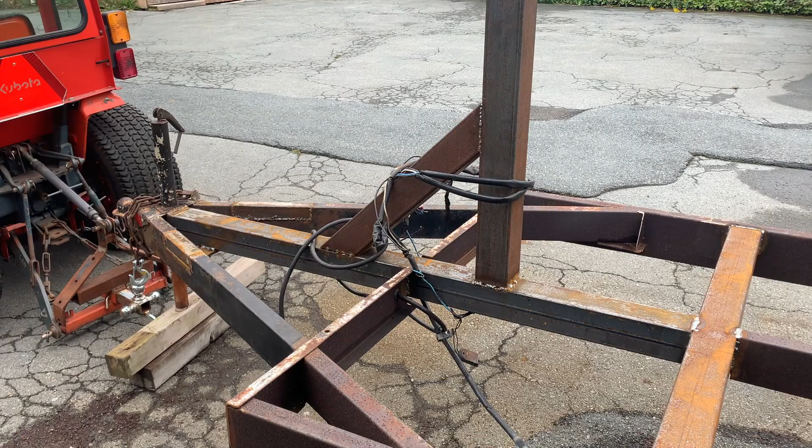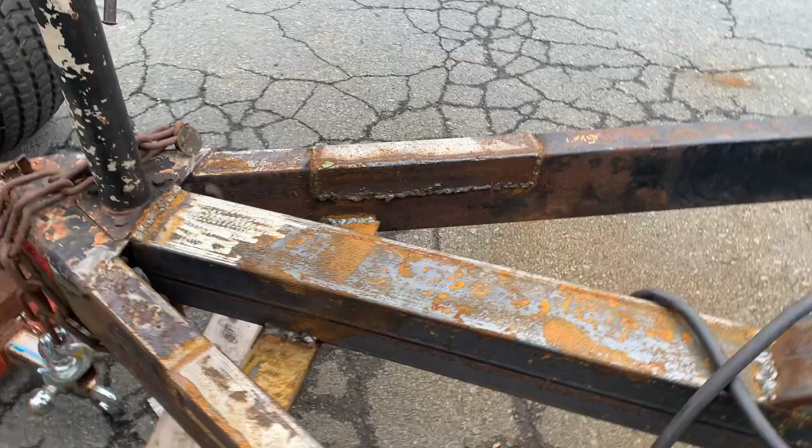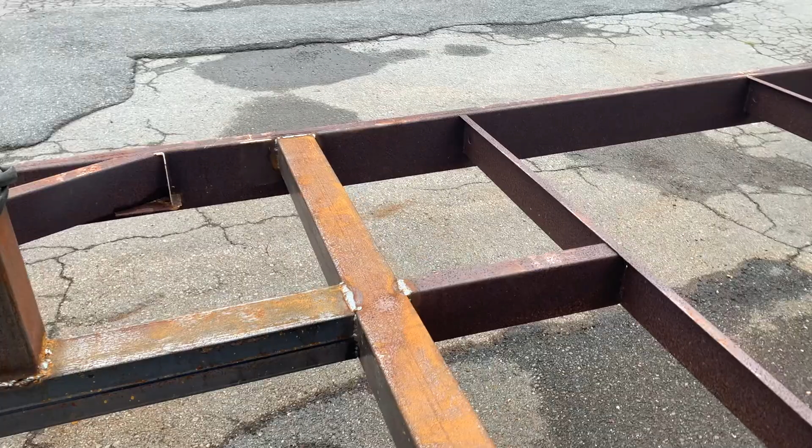Okay folks, I've got the welding all done for the frame part. Just a quick recap - as I mentioned earlier, I was going to put a brace underneath this tongue post, so now that's really sturdy.

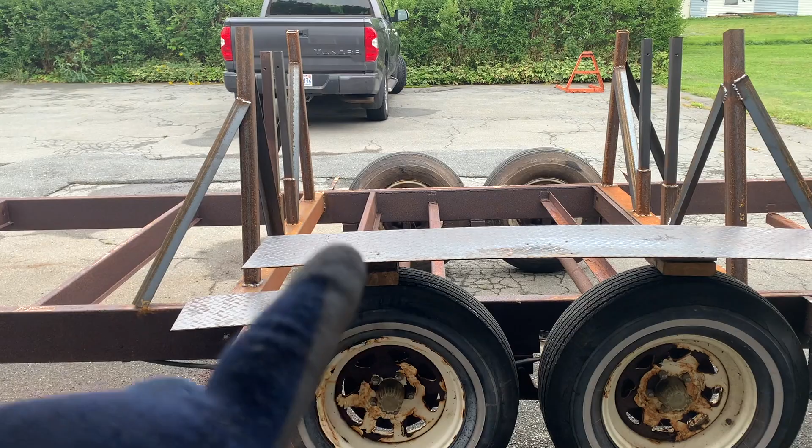The winch post is all in place, everything else is completed. If you're going to do this, make sure you weld underneath as well to give it increased stability. Let's continue with the frame portion - we're going to make some fenders. Let's review some basics about fenders. The distance between your tires and the fender should be 3 to 4 inches, to allow for the suspension to move.

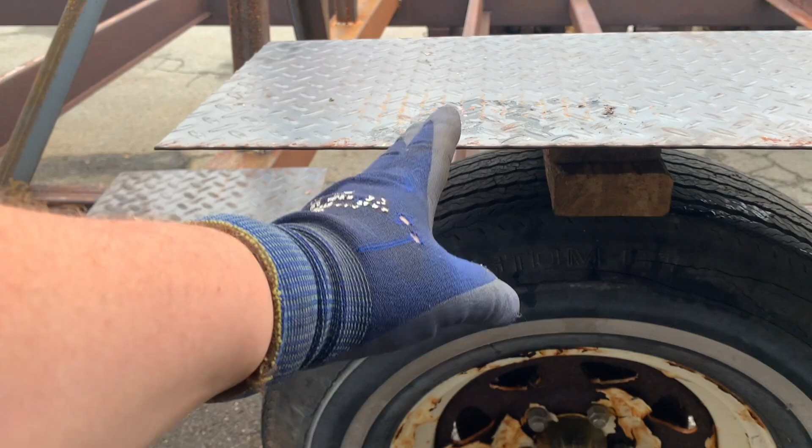Just for aesthetic purposes, I'm going to have these going at about a 45-degree angle. I've measured that, and the rear is going to have a drop flap, so I don't need to go all the way down with my fenders. Essentially this top part is going to be 48 inches, and then the remaining angle is going to be 45 at the front and at the back.

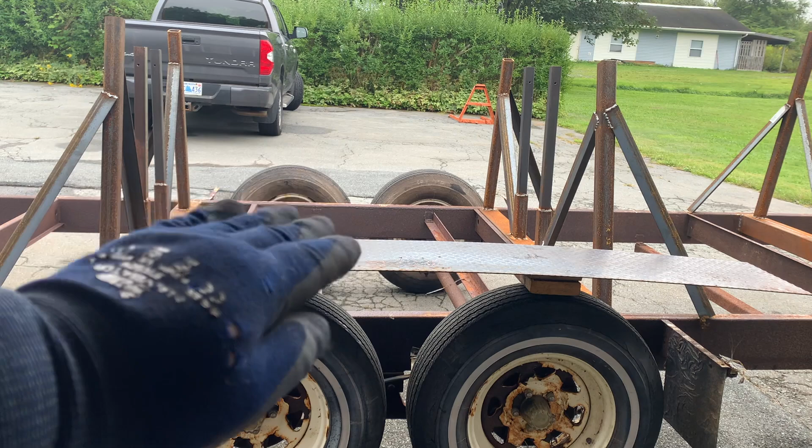That requires a 12-inch piece of this diamond plating. I'd like these to be nice and sturdy, so what I'm going to do is put a brace in the middle that's going to come up at an angle, and I'll have a triangular piece supporting the weight, and then the rest should be taken up by these cross members that are here and here. So let's get cutting.

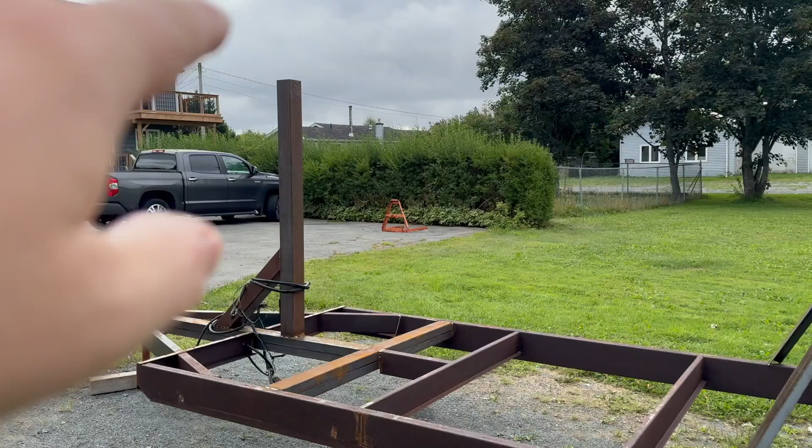One of the accessories that's going to be pretty important to put on here is tie downs, and that's for, say, a big strap to go over your boat and hold it down while you're traveling. You can't just rely on the weight. So what I'm going to install is 4 tie downs, and each one - focus on this - each one is rated to up to 11,000 pounds.

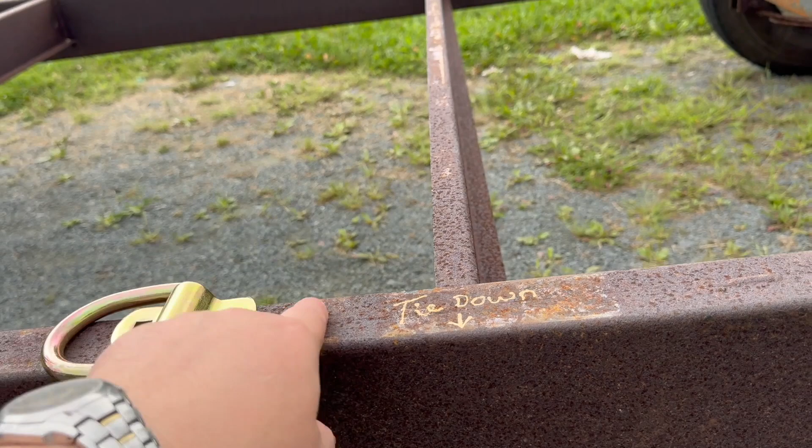Now you can choose to put them on top like this, and that would be alright, but I think I'm going to use additional surface, either by putting on a steel plate here and then welding on top of that, so that I can have additional welding surface area, make it stronger. Alright, let's weld these tie downs in place - we'll tack them on first.

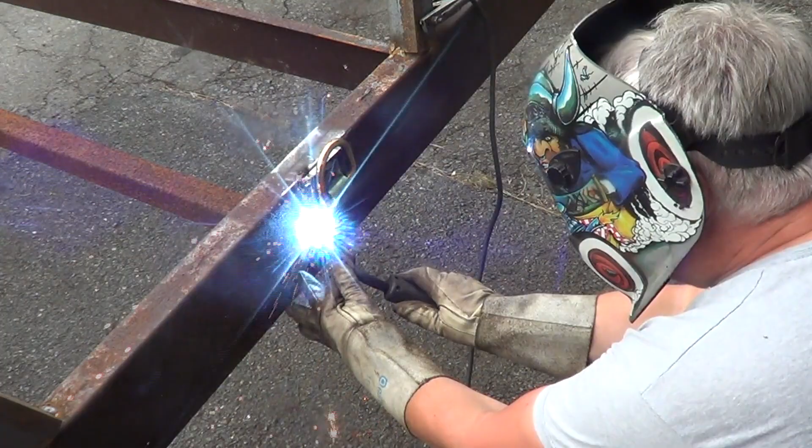Alright, I'll tack them all and then I will finish the welding.

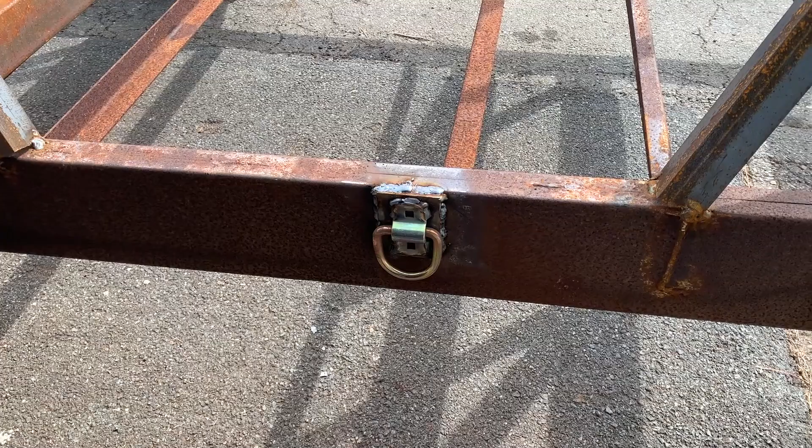The tie down welding is completed, and as I said earlier, each one of these hooks can take 11,000 pounds. So I welded each onto a 3/8 of an inch thick plate, and then welded that onto the side of the frame at the exact locations where it needs to be to hold my particular boat.

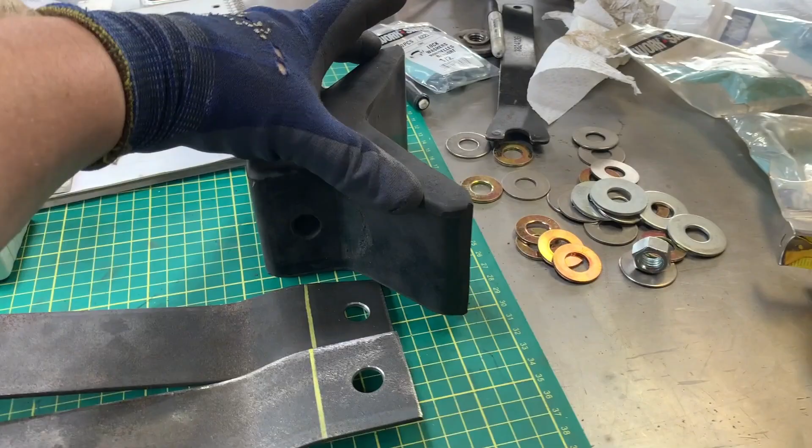My friends, it is time to work on the winch post. The first thing I want to do before I put on the winch and whatnot is fit this bow stopper. This bow stopper is 6.5 inches in width, and this block here is 3 inches wide, has a hole of a diameter of 0.5 inches.

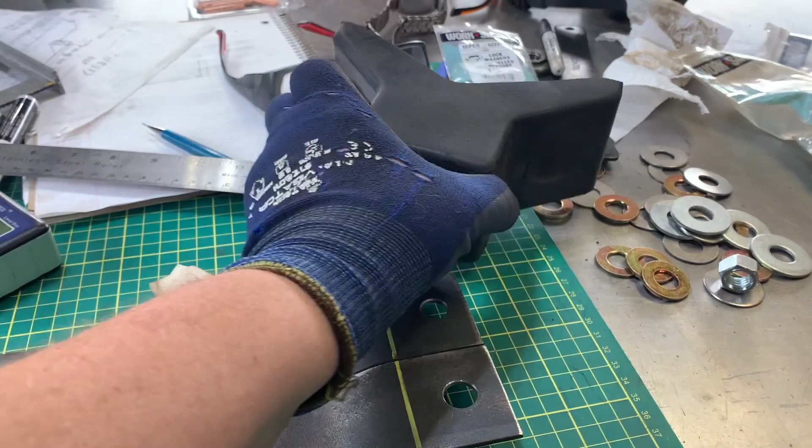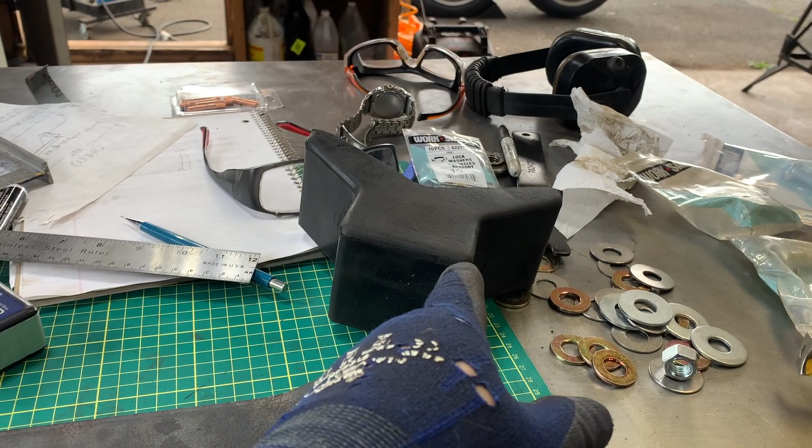So what I've done is I've fabricated 2 brackets, one to go on each side of the post, and I'm going to explain to you how I did this. Well, first of all, these are approximately - let me see here - about 1 foot long, and as you know, my winch post is 4 inches wide, this is 3 inches wide. Therefore, I needed to have brackets that had a bend of 1/2 inch in order to then clear the winch post. Now I'll go into details of how they're going to attach a little later.

But first, I think it's important to go through this - how do you get a curve on 2 pieces exactly the same? Quite frankly, it's not that complicated. First of all, you need to know the distance between where you want to end this piece and where you want to start, where it starts and where it ends. So this is about 1.5 inches. Great, so I made a mark here on both.

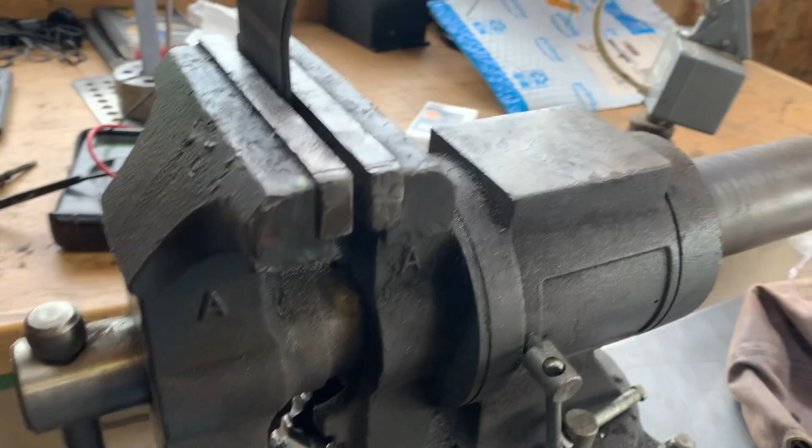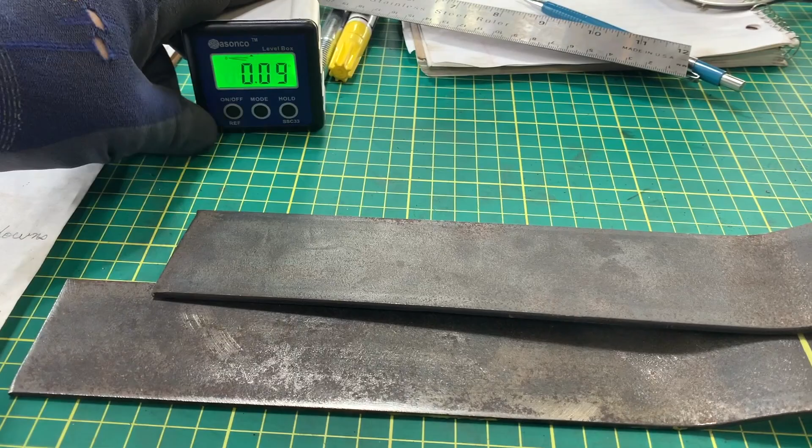Then what I did is I took both pieces, put it into my vise, and bent down right to where the mark is. At that point, you can either struggle or you can use your brain and not struggle. So essentially, I bent them until they were at 65 degrees. That bend you see here is 65 degrees, measured using one of these little electronic angle finders. It's just a fantastic tool.

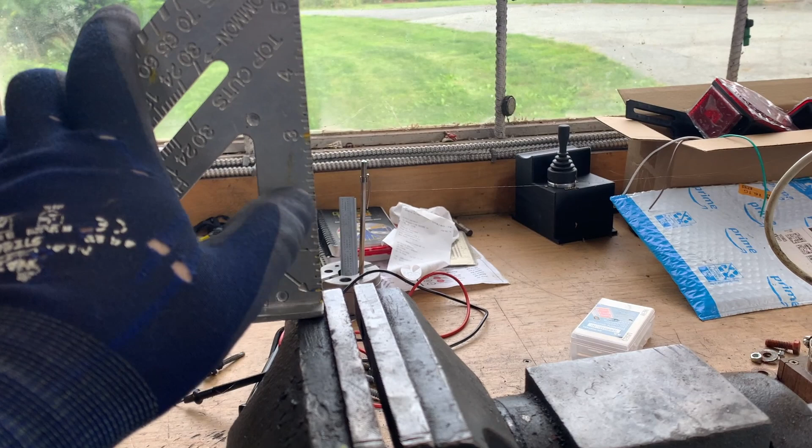Once I was done the first angle, I had to bring it back so that it would come back to 4 inches at this end, starting at this end. So I took this and made it so I basically had a piece that came at an angle, and where it reached half an inch, I scribed a little mark, which you see right here. So I put those evenly in my vise and bent them until they were 90 degrees.

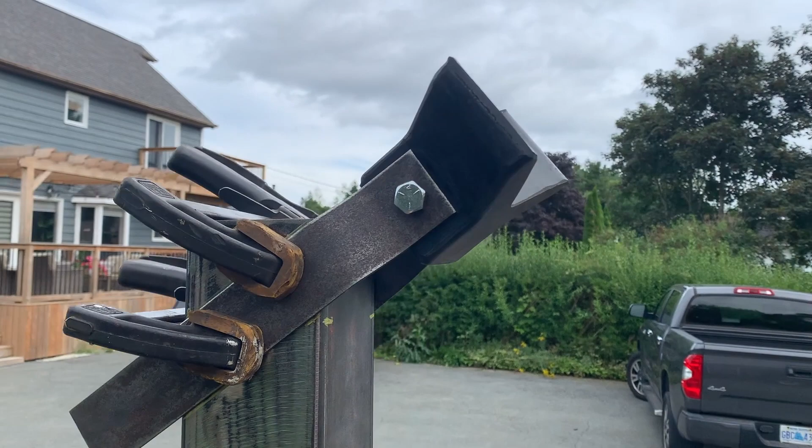And this is the result. I'm at the top of the winch post right now, and you see I've got the bracket assembled, temporarily of course. I've got a couple of clamps here to hold it in.

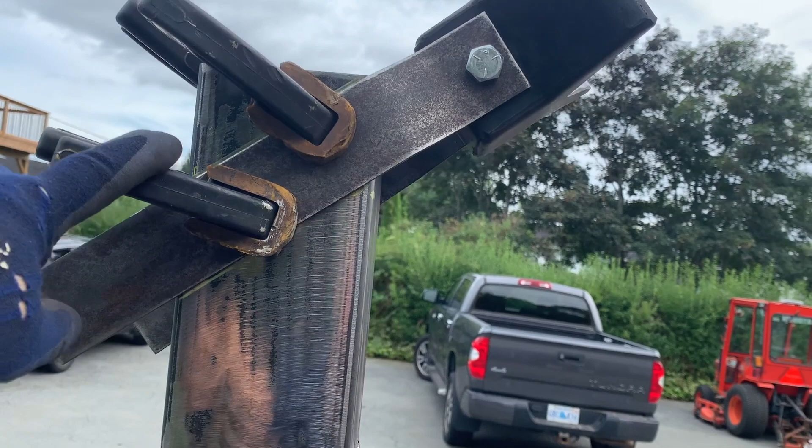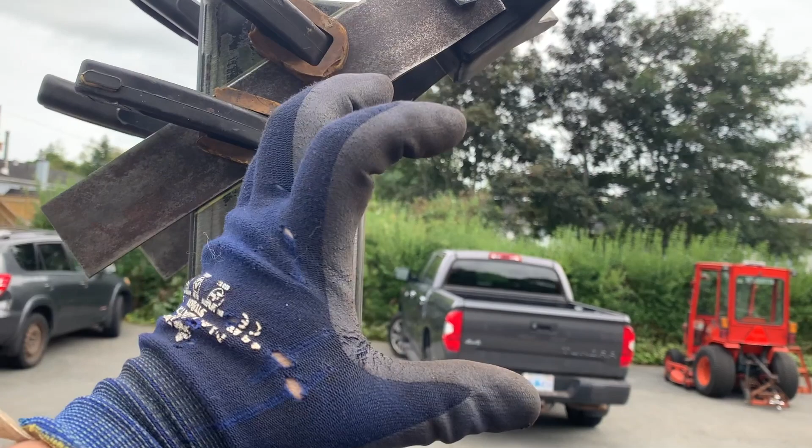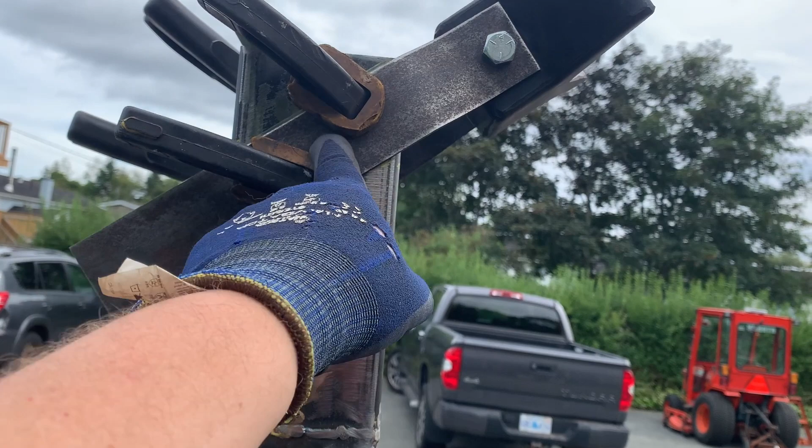One of the important things to do is to retain an angle for this bracket here. In order to do that, I think what I'm going to make is a U-shaped bracket that goes in like this, about 2 or 3 inches wide. That's going to have a hole, and the hole will go through into the post. In order to make this adjustable back and forth, I'm going to drill multiple holes that'll start here and go in 1 inch increments until I reach about 2 inches from the end. I don't want to make this too weak.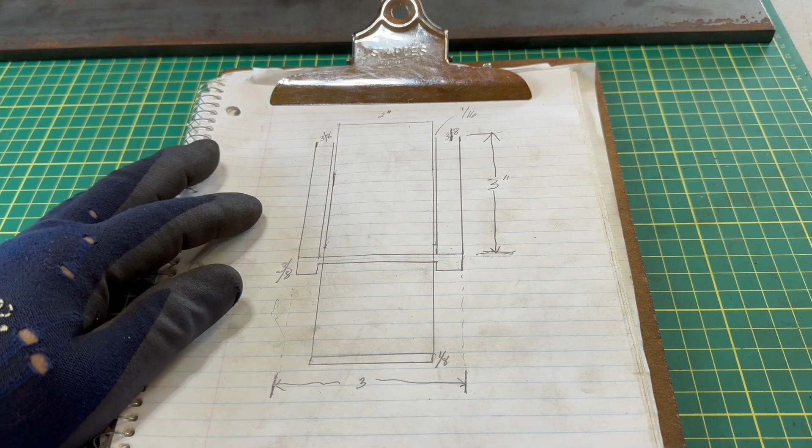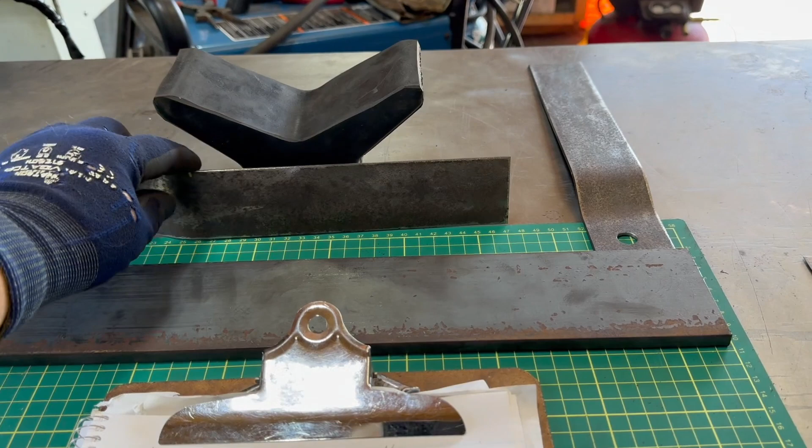Now it's time to actually finish the design and fabrication of this C channel, shall we call it, for these 1/8 brackets, which will serve as guides for this bow stop. I could have chosen to take some 1/8 steel and cut and weld stuff, but I've got a milling machine. Some of you might not, but let's roger that—I do stuff the way I want to.

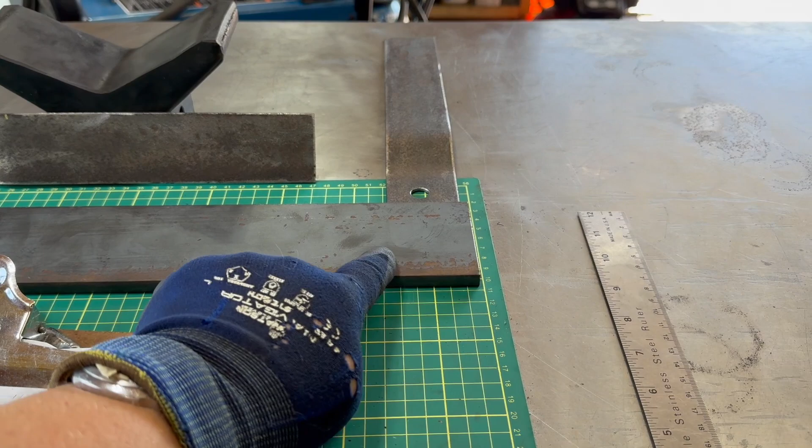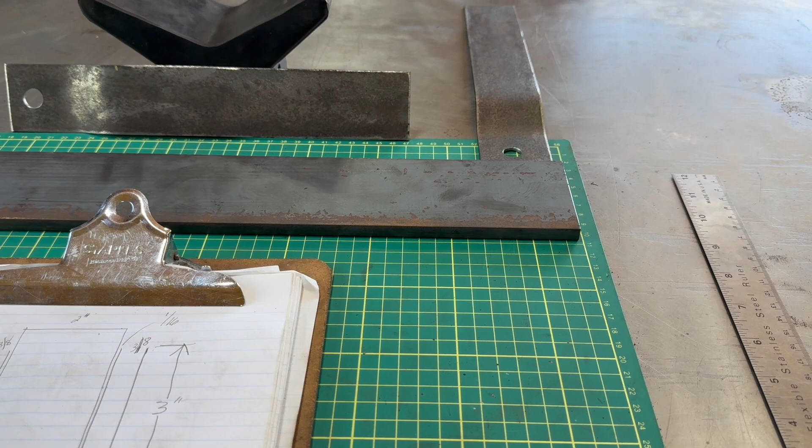So what I'm going to do is take this 3/8 of an inch steel bar, which is 3 inches wide. I'm going to cut a 3 inch piece of it, times 2. And I'm going to mill 3/16 into this thing to a width of 2 1/8, leaving 1/16 of an inch on each side so that it can slide.

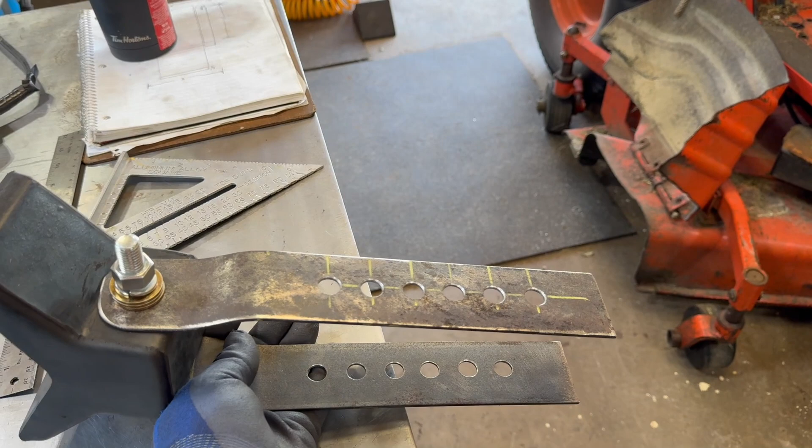I did a dry run and then figured out where to drill the holes, and so I've got 6 levels of adjustment, which is really good. So let's go and let's try it out on the winch post.

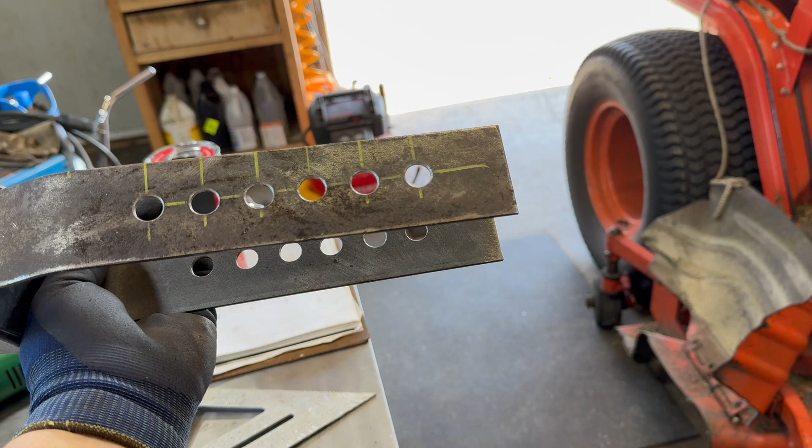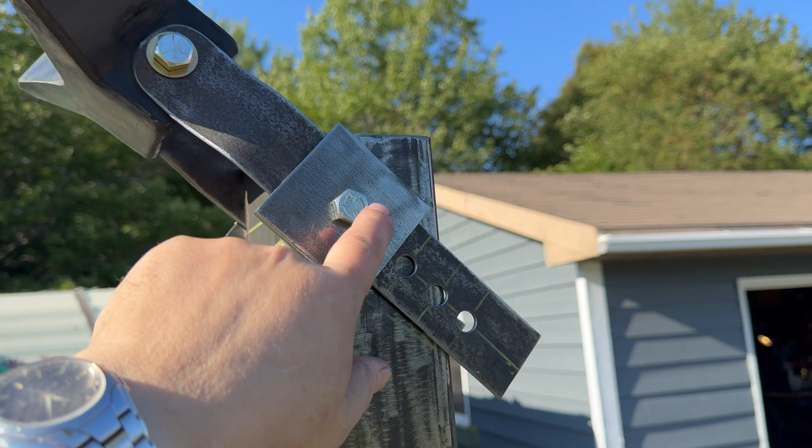All right, so this took a couple of dry runs in order to make it fit just the way I wanted, but it's working out pretty good. The bottom line here is that this C channel keeps the movement only in one direction. It is not able to let this stop move up or down, just one direction. So the only thing left to be done is weld this.

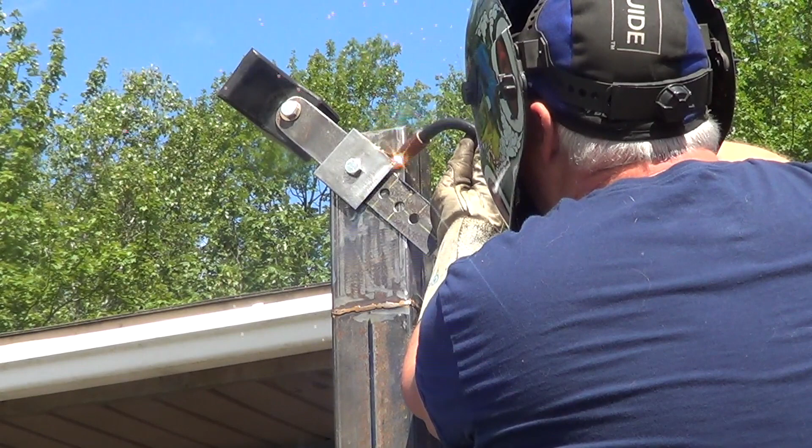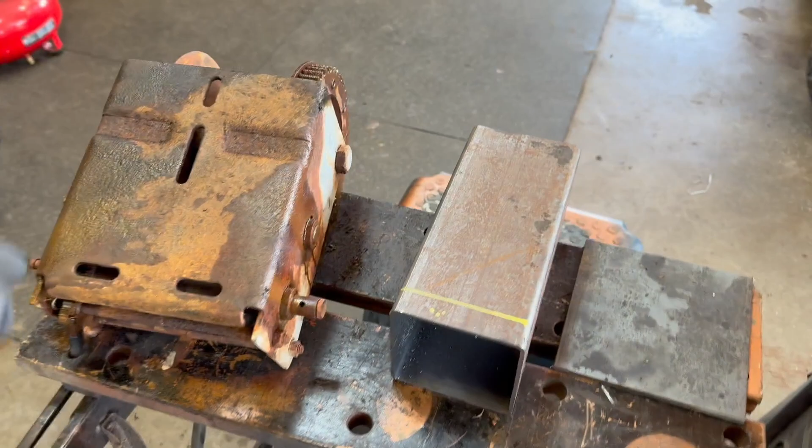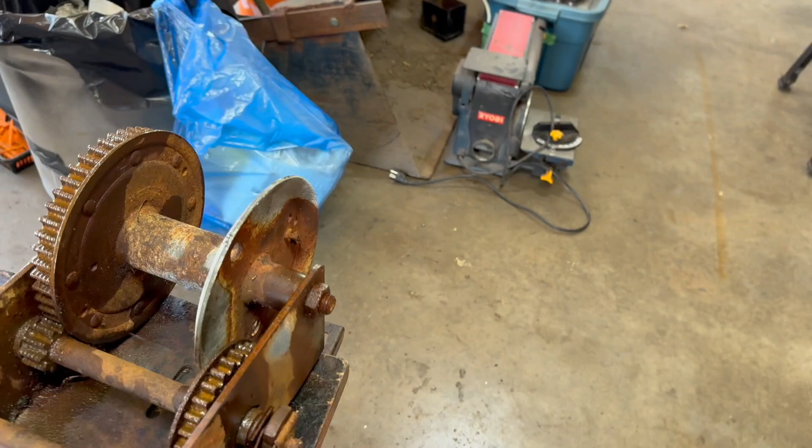Morning, back at it again, and today I'm going to tackle the winch implement. This is a unit someone gave me. It's rated at 3,700 pounds, and it's a 2-speed job. The second speed is 1,700 pounds. So I want to mount that on the winch post, and the easiest way to do that is to cut this 4x4 to length to accommodate the bolt requirement of this unit.

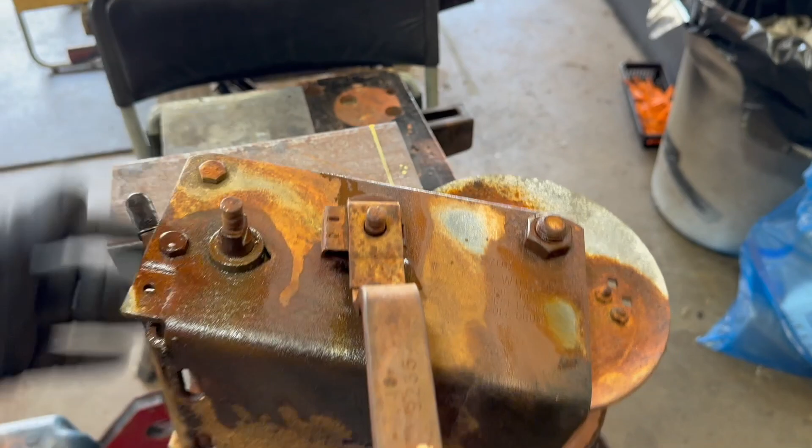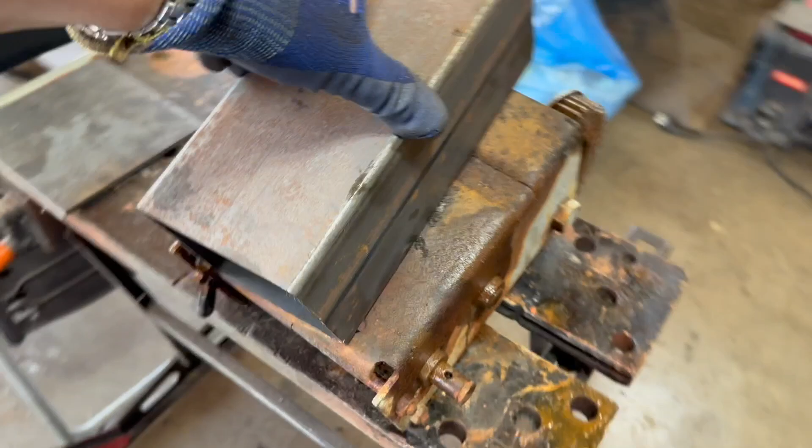Might actually weld it, I don't know. And here's the pattern, so this would cover that. I could get it nice and centered on the winch post at the back of the bow stop. So it's time to get cutting and welding again.

If you're wondering what I'm using to degrease that unit, because you don't want to have any oil traces when you try to weld, I use this WD-40 degreaser. It's very good. You can mix it with water so you get a little more for your money. Just spray it on, let it do its job, and then wipe it off, and that's the end of that.

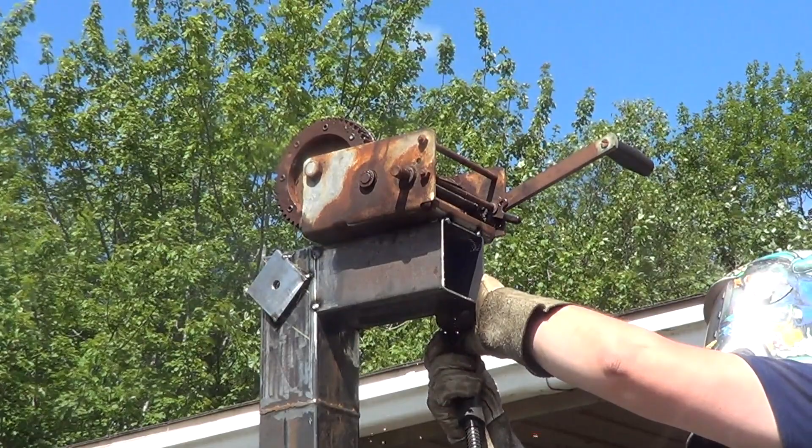So that's another part done. Got the winch mounted. It's an old winch, but it'll work just fine because it works great. I just have to get a strap for it, and that'll be that. So now we're going to move on to something else.